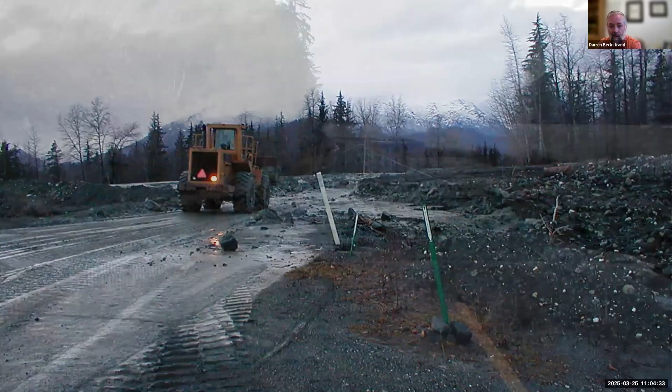So what are the geohazards affecting the transportation system? These are a lot of examples from Alaska - debris flows, erosional slopes, rockfall coming down into the highway, affecting the transportation network. These are obviously not planned occurrences - major rock slides that can close a road for a long time, or these shallow slope failures with trees, including rotational landslides and translational slides like this.

Over time, all these types of maintenance events can occur and add up to quite a bit of disturbance and blockages and lack of transportation infrastructure, especially in Alaska, where there's often not a detour. A detour might include driving 8 hours to a ferry terminal, getting on a ferry for 8 to 12 hours, and then continuing further south after driving through a mountain shared with a railroad tunnel.

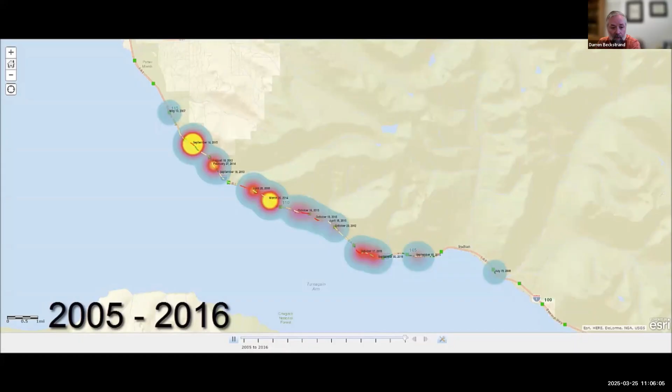The transportation networks there especially need to be reliable and resilient, with as few geotechnical hazards as possible that inhibit passage of traffic. This is an example of a hotspot map south of Anchorage on the Seward Highway, where there's been a lot of work done in the past few years with rockfall hazard reduction through a mitigation program, extending this type of maintenance tracking database to the entire state.

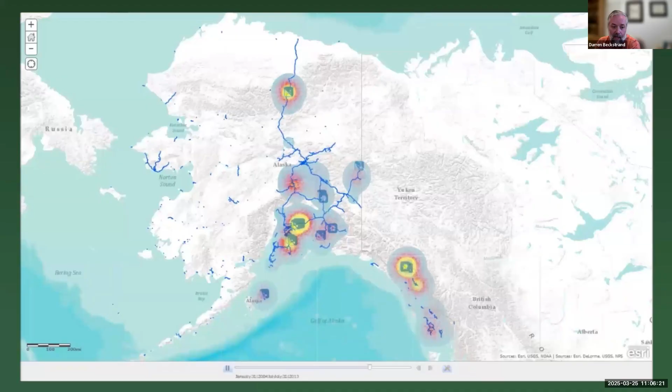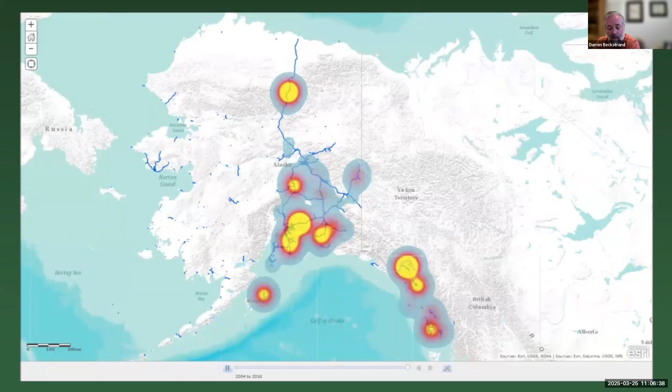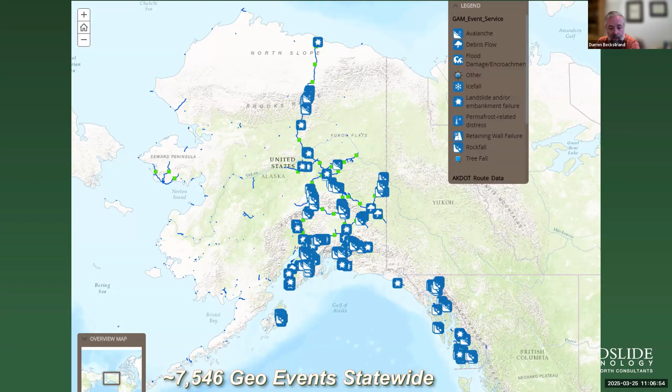You can see how you have a lot of different adverse geotechnical events over several years. As you plot these up and develop a heat map of where all these things are occurring, the concentration of where you might need to focus your energy, time, and investment can make itself evident. With this sizable problem spread throughout the state - about 7,500 adverse geotechnical events occurring statewide - it would be ideal to have a systematic system of addressing, recognizing, and evaluating these things and comparing them to one another.

That's a very good reason to manage geotechnical hazards. Typically, the normal approach - hopefully becoming less normal - is to let the ground tell you where you need to fix the slope. So the ground falls, a rock falls into your highway, you have a landslide, and you have to respond.

But there is a better way. That's also the most expensive way to typically do it. Large owners like the DOTs in the examples shown will have hundreds of vulnerabilities, producing thousands of adverse events across the entire highway network. A systematic and rational approach to help prioritize risk reduction in a cost-effective way is needed.

The transportation industry uses an approach called transportation asset management, something a lot of us know about on the periphery through the National Bridge Inventory. Notice in all those slides I had up there wasn't a single broken bridge. That's because they are more actively managed, recognized as a manageable asset. The federal government requires states to manage their bridge and pavement inventories as part of an asset management plan. The same principles can be applied to geotechnical assets to help identify, assess, and reduce those risks and reduce expenditures for a similar network outcome.

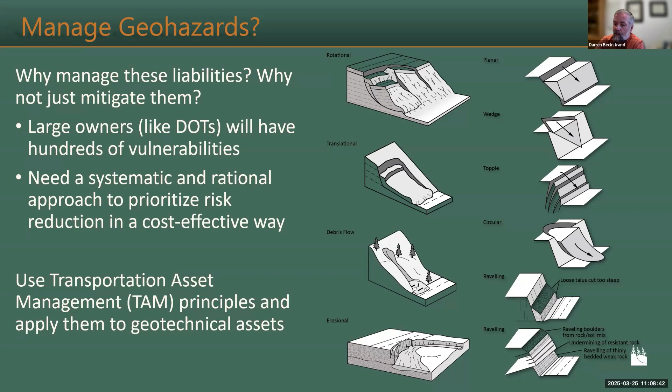So what is transportation asset management? It's a strategic and systematic process of operating, maintaining, upgrading, and expanding physical assets effectively through their life cycle. That's from the AASHTO.

Transportation asset management for bridges and pavements is required, and it's encouraged for ancillary assets, which is an improvement from the past. Ancillary assets are things like intelligent transportation systems, the signboards that tell you traffic delays, guardrails, sound walls, signage, striping. Those are all, including geotechnical assets like retaining walls, types of things encouraged to have an active, proactive management program.

But what does it actually mean when it comes to the folks in the states to manage the program? It means that no federal directive is required, so it may mean that it's likely considered optional by management. Fortunately, there are enough states starting to recognize there's a benefit to it, so that's changing a little bit.

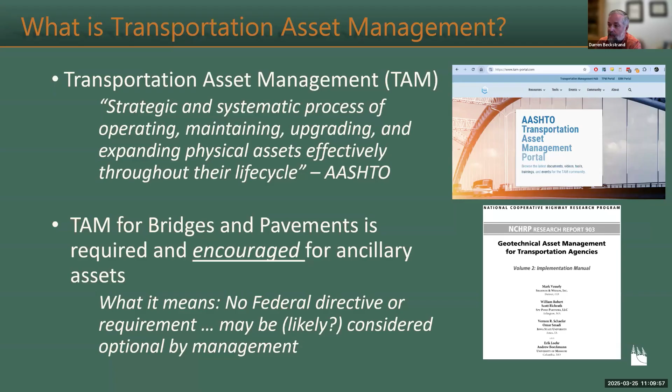The application of TAM business models to geotechnical assets is kind of a difficult thing to explain, so I've tried to do it here in an explanatory paragraph. Imagine you are a geotechnical professional working for a DOT, and you want to be able to say: my department has 5,000 geotechnical assets. That, again, gives you the inventory to know what you own.

And of those 5,000 geotechnical assets, 75% meet performance criteria. So you set expectations, and then measure the performance of your assets against those expectations. Pavement does that quite often—they'll have dashboards up saying 90% of our interstate pavements are in good condition. That's something we can also do for geotechnical assets.

We're also able to estimate deterioration. If we do nothing in 10 years, instead of 75%, it'll drop down to 65% meeting those performance criteria. And that uncontrolled deterioration will have a cost that we can estimate—resulting in $10 million of direct costs and indirect costs of $30 million.

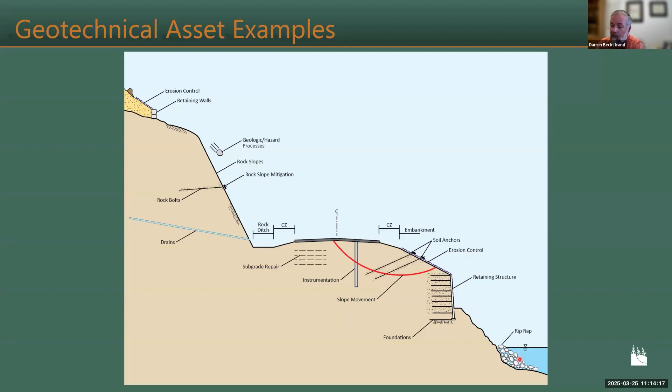Since then, additional states have been focusing and expanding their asset management system. Some states that don't have a lot of rock slopes, which is most states of course - the West Coast or Western U.S. had a lot of rock slopes, so they were some of the first, and then in the Northeast they had some of the first programs that evaluated that stuff. But some of the Midwest and Southern states have been focusing on their geotechnical assets, such as retaining walls, and expanding and addressing those things since 2010, especially more in the past 5 or 6 years or so. It's starting to gain some steam, and states are doing it.

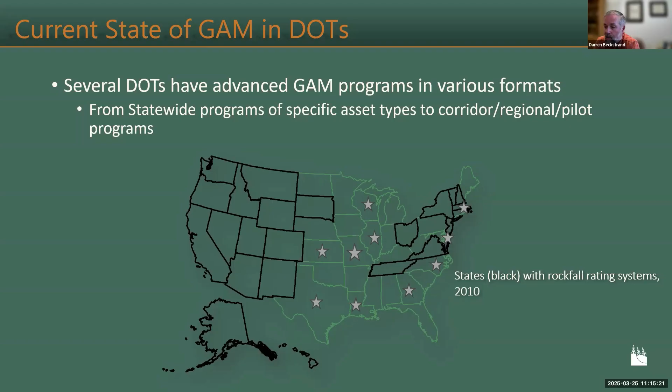So a few key components, highlighting again that explanatory text from the previous slides - key components of a mature GAM program. I call out mature with some intent. A state DOT doesn't have to go in both feet first into the pool; they can dip their toes in and start with an inventory. There's no required way to accomplish these things, and there's no wrong way to get started. But what is critical is that you understand that a lot of these things are great to have if you own thousands of miles of highways.

So key components of that mature GAM program: it provides an inventory. A lot of owners don't know what they have, don't know what's out there, don't know where walls are. And just because you don't know doesn't mean you don't have any liability and that there's no cost involved, because those deteriorating assets will make themselves known usually at the most inconvenient time.

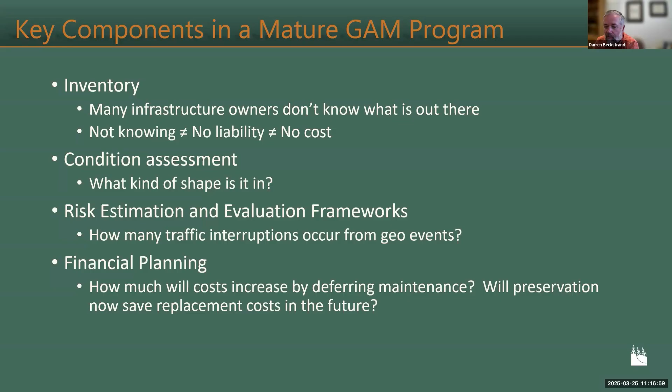It also provides a condition assessment - what kind of shape is it in? Is it in a good condition that is expected to preserve performance for a long time, or is it in poor condition that needs major repairs? Then there's risk estimation and evaluation - how many traffic interruptions may occur from these geo-events, from these unknown assets that we might have out there? And then financial planning - how much budget should we set aside for these things over time?

And we also gave them preliminary assessments of A, B, or C, if that's possible, to help focus where the more field time would be required.

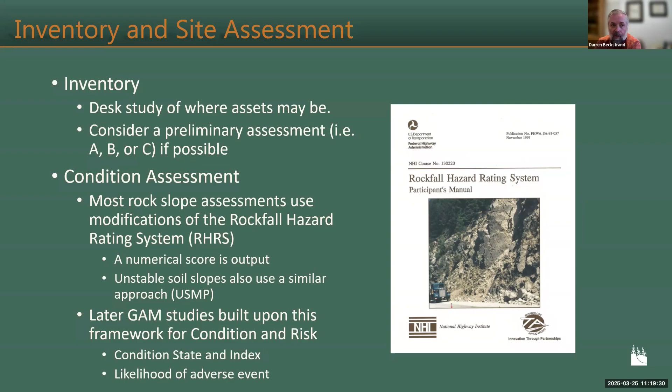Site inventory and site assessments are typically the best place to start. As I said, the site ratings, you collect a lot of different information. I'm going to go through the Unstable Slope Management Program, kind of touch on some highlights from the USMP form for the federal land management agencies.

That program is contained largely on a two-sided piece of paper, and you start with the location information - highway mile points, left or right, lat long of where it begins and ends, some geometric data of the site, and it has geologic data and judgments incorporated into the ratings.

Some performance data, rockfall history, how often maintenance has to act on there, and consequences of the failure - how much traffic relies on that road.

If you don't have good traffic numbers, does that road go to a very important boat dock for the Bureau of Land Management? And if that road was closed, then the local economy starts to die down. Those types of judgments and assessments can be built in there.

If you're in the national parks, is there national, environmental, or cultural impacts if this unstable slope continues to fail uncontrolled? Those evaluation forms are set up specifically for special purposes, for national parks in this case, or for those specific cultural and environmental impacts.

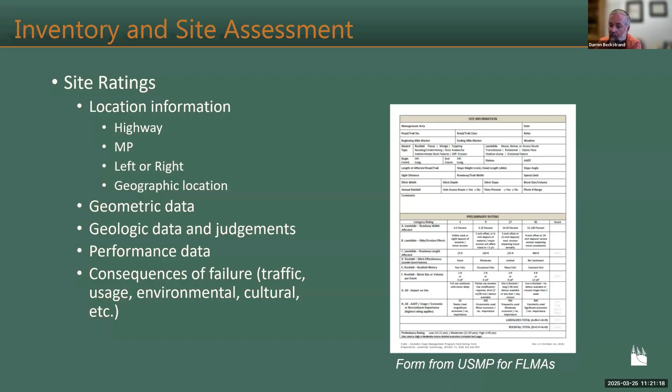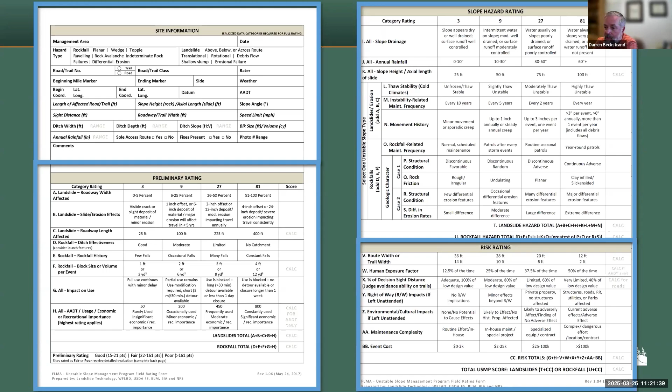Zooming in a little bit on the two-page form, you have site information, a preliminary rating category, slope hazard ratings, and a risk rating. So you have over 24 different things to evaluate on each one of the unstable slope sites that you might have throughout your state. I'm just going to touch on a few things on this as I go through the presentation.

The site information portion of it, this is the top quarter of page 1. You have things like what management area and what date the slope was evaluated, hazard type - rockfall, landslide - the road number, and other site measurements like sight distance, length of the roadway affected, slope height, speed limit, block size, and some comments.

It's always good to have some comments in there to kind of give a quick synopsis of what the evaluator wants to most effectively communicate about the site. This is a lot of information, but a lot of it can be pre-populated through that desk study.

The intent for all this, believe it or not, we try to spend only about 15 to 25, 30 minutes at a complex site, going through and evaluating the entire site and then moving on to the next one. So all this information does facilitate a pretty quick assessment of the sites.

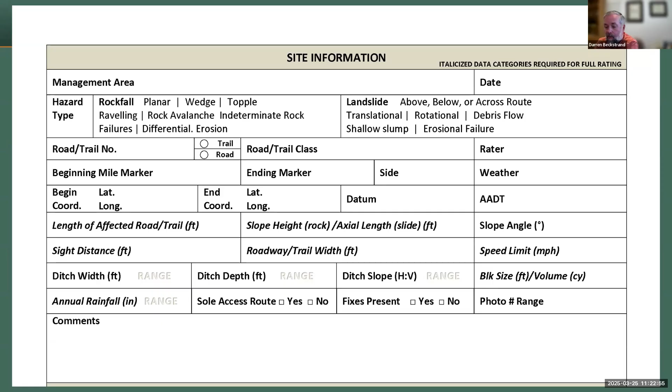Some example information being gleaned - you have the road and trail number. Trail number is something the National Park Service specifically wanted in this one. They wanted to be able to evaluate the importance of high traffic or even low traffic trails and how they're exposed to geologic hazards. That's pretty unique in the USMP system.

But corridors, highway numbers, route name, classification - if you're not familiar with it, we're all familiar with the interstate system, but most DOTs have primary arterials and secondary routes and whatnot, and those are often important to gather and understand, so you can help gauge the importance of that route and the performance of the roadways next to it.

You can also evaluate if it's a sole access route. So especially in some of these western states, they'll have a highway number that just goes to a dead end. And if that slope fails and no one's able to get in or out, that's a different importance than something with an easy detour.

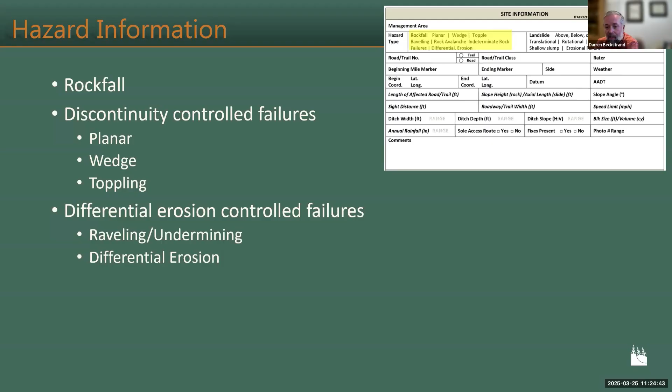Hazard information that might be going on there - rockfall, discontinuity controlled failures. So things like planar, wedge, or topple failures are more of the hard rock type of failures. And then also differential erosion failures. In the southeast, more sandstone, limestone interbeds, where you have the more weatherable prone materials weathering out and destabilizing the sandstone above.

Topple failures - I'm standing in an opening tension crack high above a rock slope in Montana, where in this case we wanted to make sure that it was still moving before the state decided to monitor or do anything with it. And yes, it was moving, and the tape extensometers and crack meters did demonstrate that.

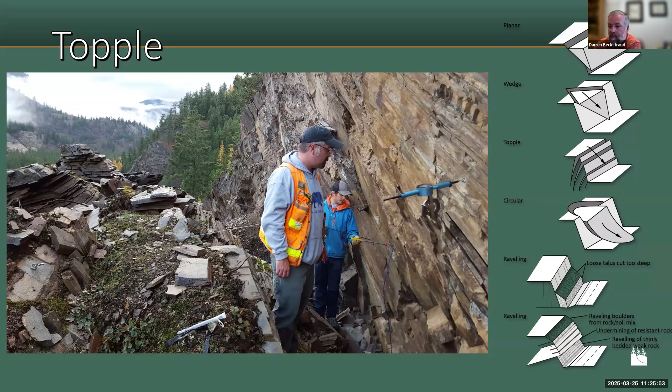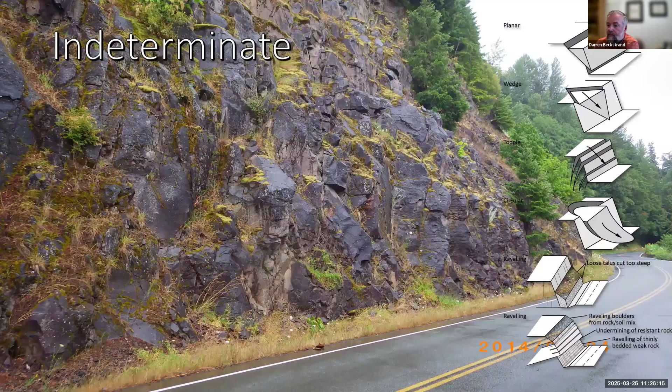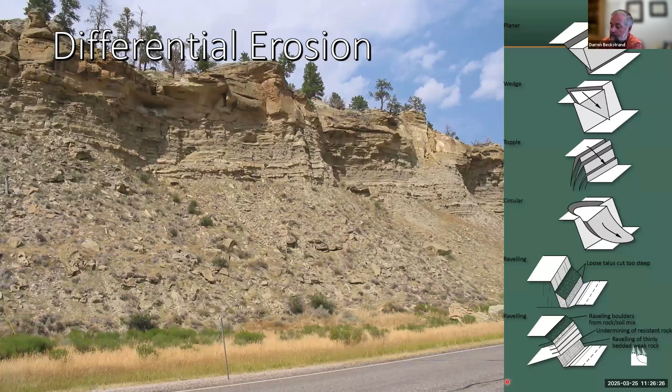Oftentimes you'll have a slope where the structural condition is not as clear. This is more normal: a bunch of intersecting discontinuous joints combining to have 1 to 3 foot blocks fail out. Differential erosion failures of siltstone sandstone beds, in this case in Montana, where large blocks might fail out over time. A recent picture from Tennessee of differential erosion slopes being evaluated for Tennessee DOT.

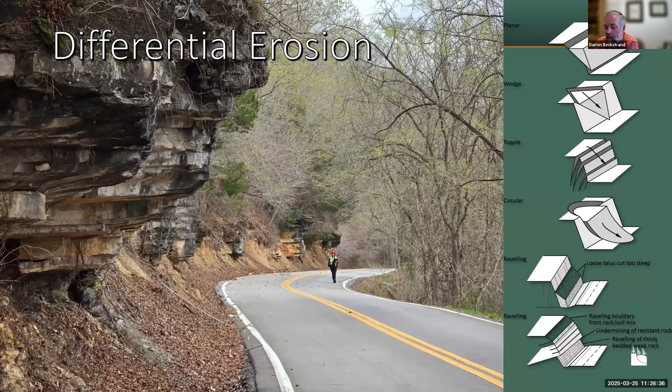Landslides are something in the USMP that was evaluated. Where is the slide located relative to the road? We have some of that basic information. Is it above the road, below the road, or worst case, it's both, going through the road, taking the road down for a ride.

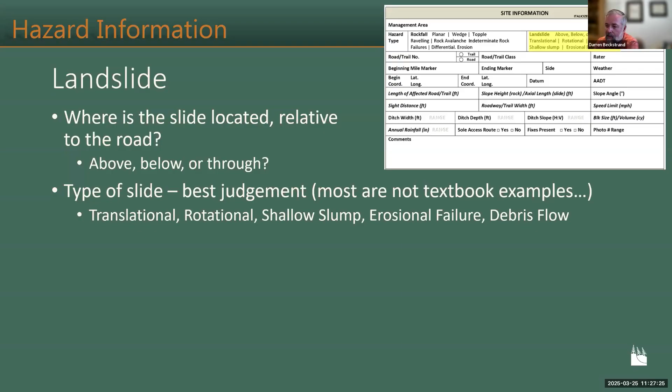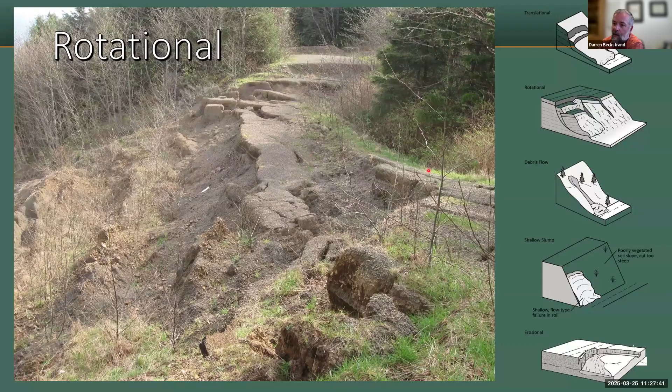Type of slide, best judgment is what's warranted here. Almost every slide is not a textbook example of a nice rotational or translational failure. But here's some photos showing characteristics of rotational failure, where the material rotates backwards into the headscarp, sliding down and rotating slightly near the headscarp of the slide.

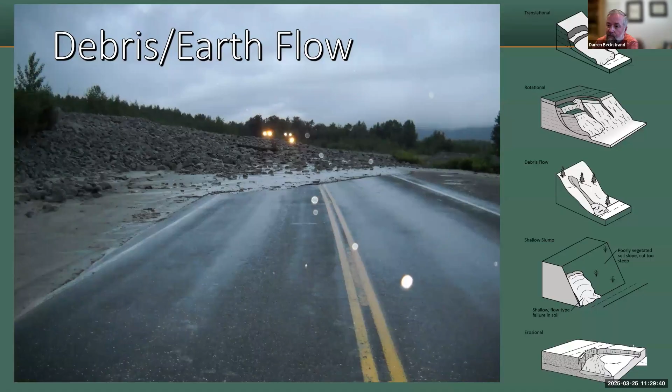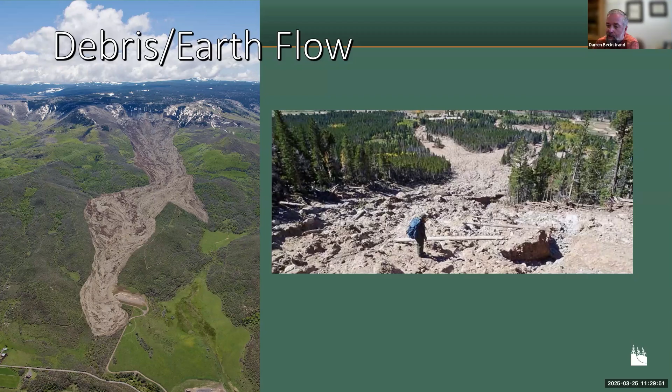Earth and debris flows in the USMP system are categorized as landslides. One from Colorado - I know several folks here from Colorado - this is the Salt Creek slide, I think I got the name right. Then the headscarp from another debris flow on the right.

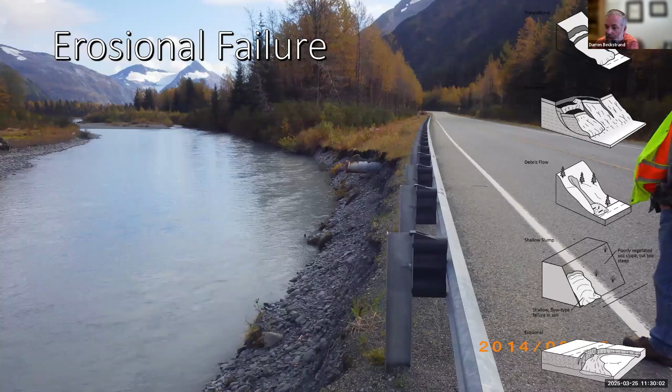Erosional failures can be classified also as landslides. Getting these in the inventory and condition assessment so you can prevent them, rather than just allow them to eat away the road, is important. Same thing with easily erodible material slowly eroding out on oversteepened slopes that your highway is sitting on.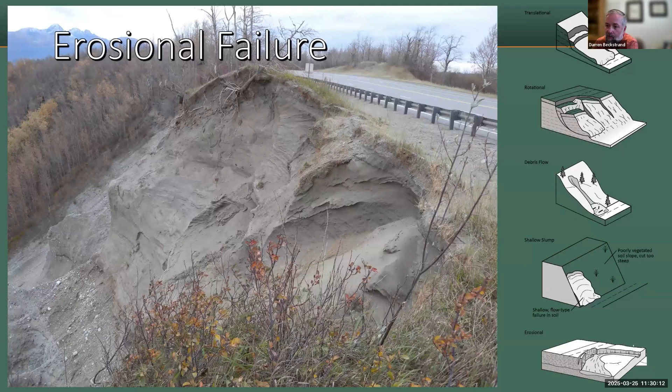Often here in the Pacific Northwest, these slump failures are the most common landslides we see, where the overburdened soil on the side of the road just slumps out during heavy rain.

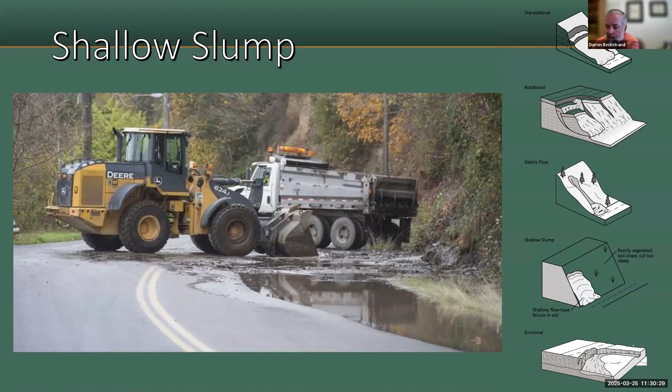Other rating data collected in these types of programs are numerical data rather than judgments on the nature of the slides or rock slopes. We look at slope height measured as the vertical rock slope, and we estimate the axial length down the slide.

If possible, you can do some reconnaissance to find the slide toe, but oftentimes it's masked by embankment riprap or fill. You don't always have that clean toe coming out. So you have to use your professional geologic judgment to help define those, and your equipment is typically handheld: a laser rangefinder is wonderful, along with a clinometer and tape, doing some trigonometry, or better yet having your Excel sheet do the trigonometry while you're out there.

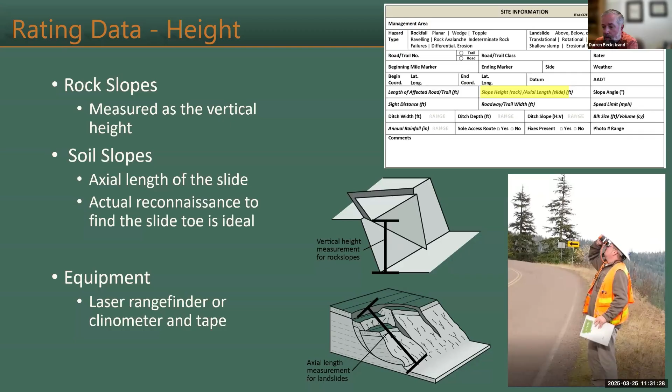Another type of measurement data that is collected is sight distance. That's something that as a traveler, you typically understand — if there's a sudden surprise in the road, you want to understand that that's a risk to you. As I'm sure we've all done, coming around the corner, you see something, a deer or whatever.

You have to quickly stop or slow down to avoid the hazard. So this is an estimate for, say, a rock being in the road. The evaluators are typically on site doing our best to safely measure sight distance during live traffic. We're often not idealized like in this photo walking down the travel lanes — we're often on the shoulder, or we'll use our rangefinder to estimate that sight distance. So again, 15, 20 minutes on site, you're doing things pretty quick. We use a roller tape or a laser rangefinder to do that.

A couple examples of sight distance. If a rock came rolling off the hill here, you're going to see it while flying down the road at 55 — or in Montana, probably 70 miles an hour — but you're going to see it, you're going to be able to avoid it. But right around the corner, if you're coming this direction and this rock's in the road, even though it has a 35-mile-an-hour speed limit on the corner, you still don't have a lot of sight distance. The sight distance can be blocked by the guardrail, vegetation in the ditch, or other material in the ditch that is hindering sight distance. So that's an important risk aspect that we measure while we're out there on site.

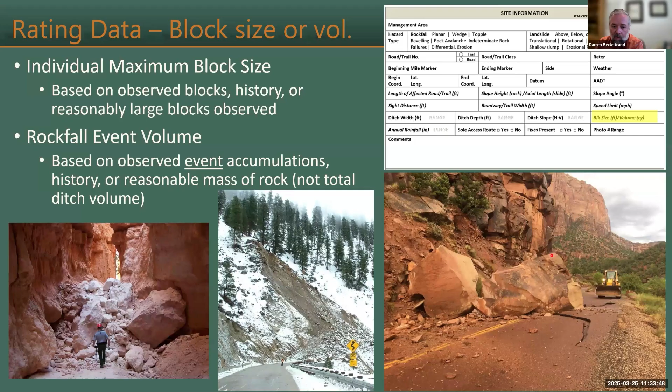Other data that is recorded is block size. You would expect big blocks like this, large volumes, on the highways or trails — that's going to rate very highly, right? Instead, if this rockfall was just this rock down here, you would say well, that's not great if it's flying down the hill and goes through a windshield, but the risk is greater for these larger blocks coming down. So a lot of it's intuitive with how these are rated.

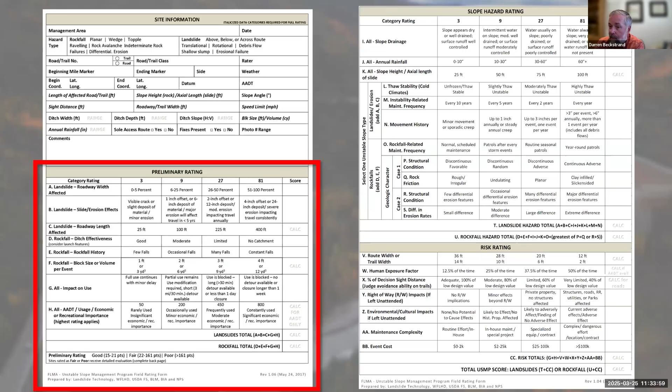Jumping down to the preliminary rating from the site information tab, there are several different categories on here. Several different categories for landslides, for rockfall, and how it's scored.

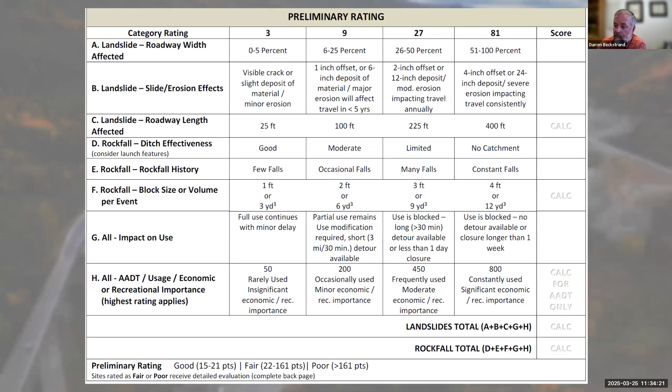Slope types are hazard criteria for landslides — they focus on impacts to the road and trail. Hazard criteria for rockfall focuses on size and frequency of the rockfall and the ability to keep debris off the road or trail. Risk is something that you can compare on both slope types in the USMP system. What are the consequences of failure? How important is the road or trail? You can base it on traffic loads coming across the top here, or if you don't have traffic counts, some guidance for opinion. Note that this all has A, B, C, or D type markers or designators on it, so you can help add up and define which categories add up to what.

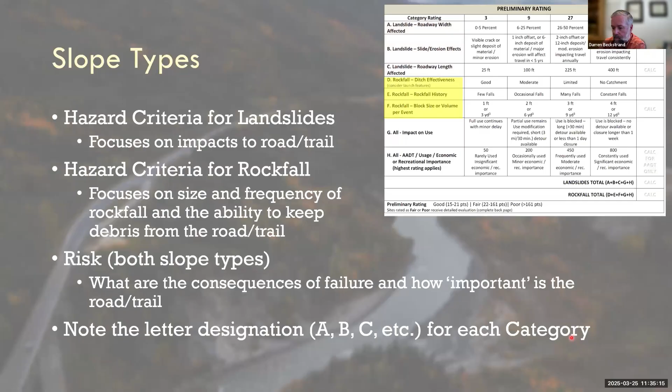So all these ratings are exponential — notice across the top, 3, 9, 27, or 81. That's to help bring the high hazard slopes to the top, regardless of what brings them to the top. A minimum of 1, and it does max out at 100. Each individual category score here is based on this 3-to-the-power-of-X.

Some categories are based on judgment and approximations, and others are based on calculations from the site information portion of the form. For example, this is a score that evaluates the economic importance — ADT divided by 50, the square root of that, gives you the X over here.

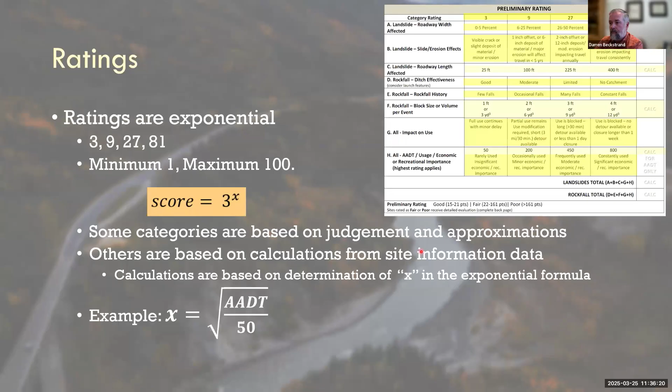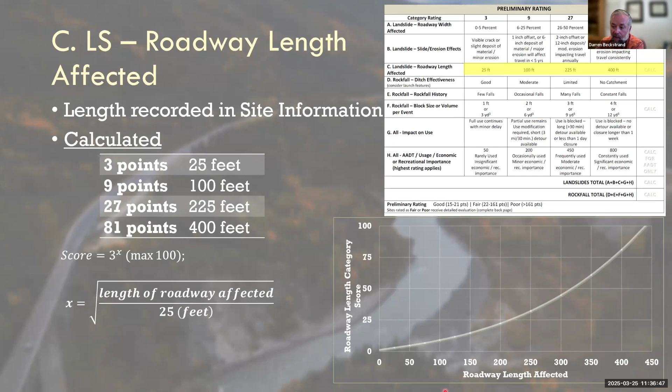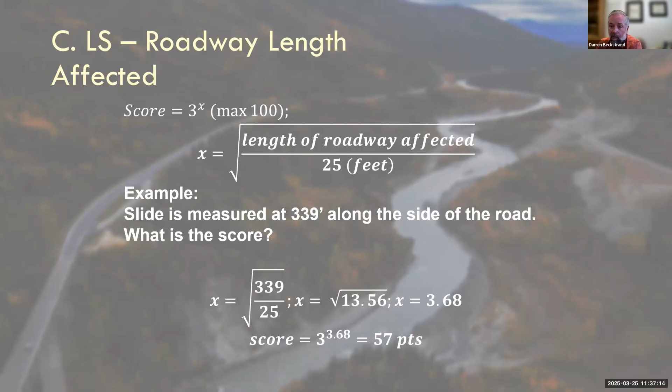Going through a quick example: if a slide is measured at 339 feet along the side of the road, what's the score? 339 divided by 25 gives you the 3.68 exponent, and a resultant score of 57 points. This is why it's good to have a calculator, a database, or a data entry platform to help you with these calculations rather than pulling it off a chart on site or doing the math on site — you're trying to rapidly go through it.

Those are ones based on site measurements. Others are based on the opinion or judgment of the experienced geoprofessional on site to evaluate it. To highlight that approach, the ditch effectiveness is based on history, judgment, and site observations.

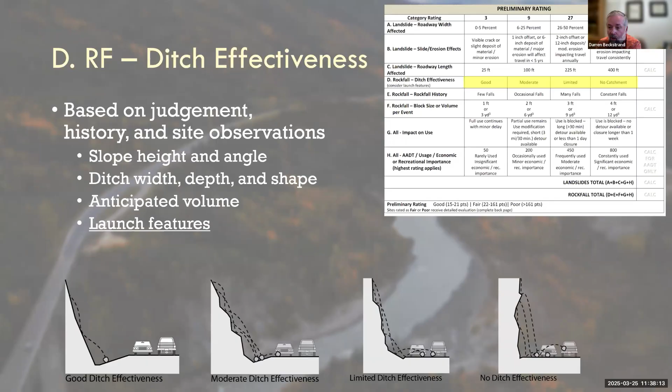Slope height and angle, ditch width, depth, and shape, the anticipated volume of debris that ditch would have to collect, and especially launch features. That takes a little bit more of a trained eye to help understand what the launch features are, if you can imagine a rock falling down the slope.

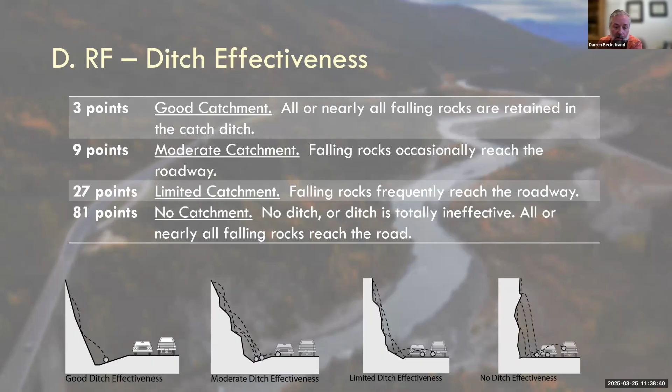So some photo examples after this slide, with some text and explanation that goes with it. So 3 points is the low score, good catchment: all or nearly all falling rocks are retained in the ditch. All the way to 81 points is no catchment: no ditch, or the ditch is totally ineffective, and all or nearly all falling rocks reach the road. So if you have a highway, you'd want a ditch to look like this, nicely regraded.

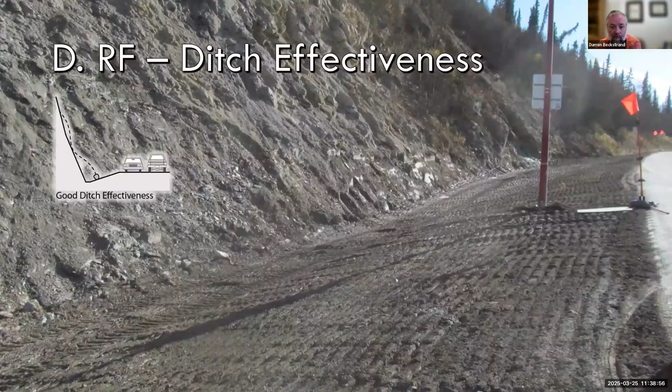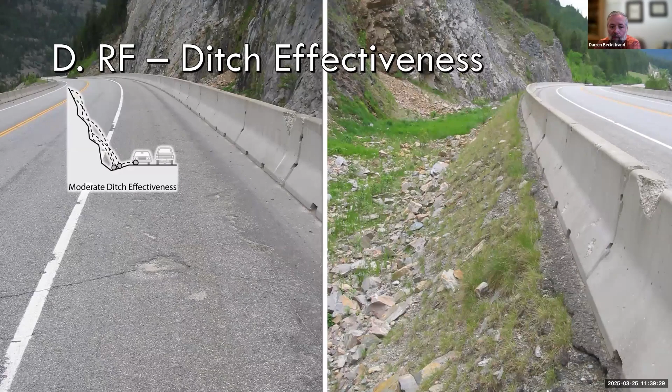Other clues: this ditch is pretty big, what used to be called a Ritchie ditch. You can see some damage shown here, some rocks coming down and even damaging the concrete barrier and impacting the roadway. So those are signs and clues an evaluator uses to say, hey, this ditch is big, it catches most of the stuff, but the rocks coming off that slope, it's too tall.

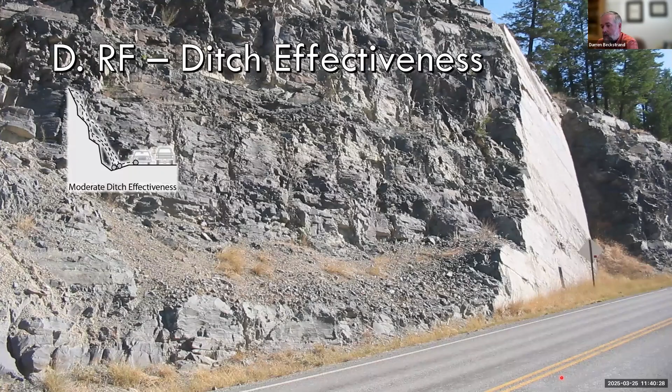And they will still fly out and break apart, only having a moderate ditch effectiveness. Again, this one has a bit of a launch feature coming off here and a relatively small ditch. Comparing this portion of the ditch to this portion, you usually want to take the more conservative approach and take the reasonably worst case scenario from a slope, not just look for the best parts of it. You're not trying to give brownie points to these slopes, you're trying to accurately assess the risk.

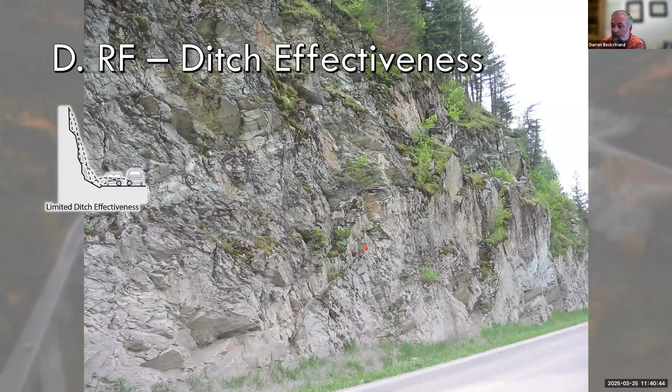This one is a pretty narrow and pretty tall, irregular ditch, so it has pretty limited ditch effectiveness. You can probably imagine most rocks coming down will be able to escape that ditch with relative ease. And this one is also limited.

You're on a turn, which doesn't matter for ditch effectiveness, that's a different risk category to be scored. But the big one here is this launch feature. As the rocks come down that slope, all of them are going to hit this bench, and it's inclined such that they all get redirected right out onto the road. So this one would really get docked in the score category for how that slope is redirecting rocks onto the road.

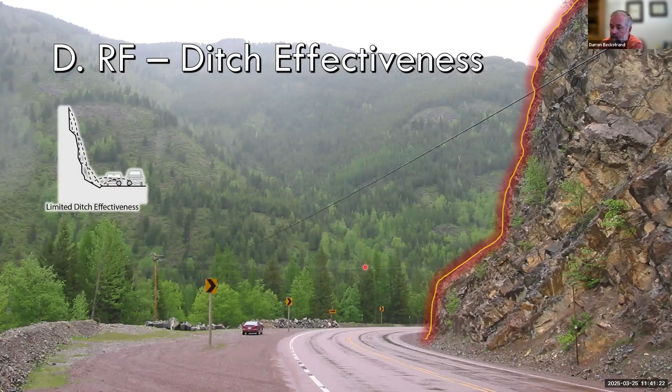This ditch, it's not uncommon, especially in mountainous areas or highways, two-lane highways connected or constructed in the 50s, that the ditch might only be a couple feet wide. This is a forest road ditch, and this one is from a picture from earlier. So this is limited ditch effectiveness.

And no ditch effectiveness, sometimes the contractors back in the day said, well, the road can fit, so I'll just put it there, and the owner said, okay, save me some money. But this one doesn't have any ditch effectiveness. Rock comes off here, it's going to drop right in the road. And on Going to the Sun Road in Glacier National Park, there's also no ditch in that entire road. So if you've ever been there, it's a great place to visit. It's a great place to spend as little time as possible underneath the rock slopes also.

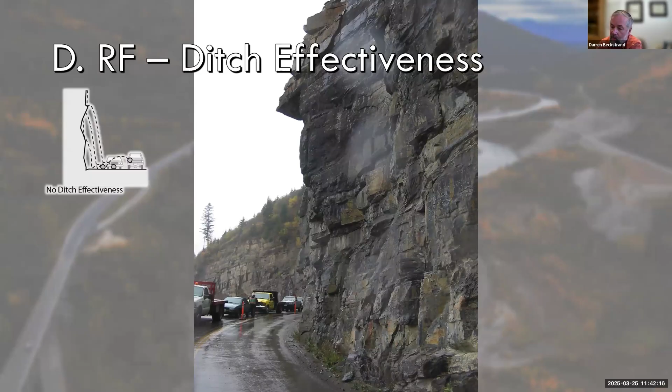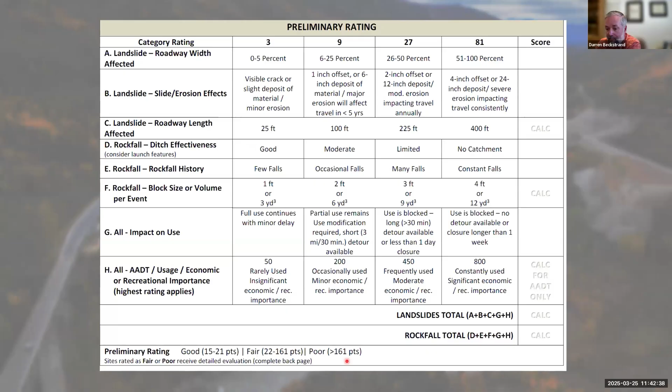So at the end of this, we have the preliminary rating. Add up all these things, evaluate them, and you get a preliminary rating. And if you have a fair or poor based on the sum range, you flip the sheet over and continue doing a more detailed evaluation of the site.

So turning that form over, we have the slope hazard rating, with several categories: slope drainage, annual rainfall, slope height or axial length that we talked about before. Landslides have categories such as thaw stability, maintenance frequency, and movement history, while rock slopes have rockfall related maintenance history. Then also the geologic character - this is where the ability for a geoprofessional, a geologist, or a qualified geological engineer to come through and evaluate these more qualitative aspects of the slope is important.

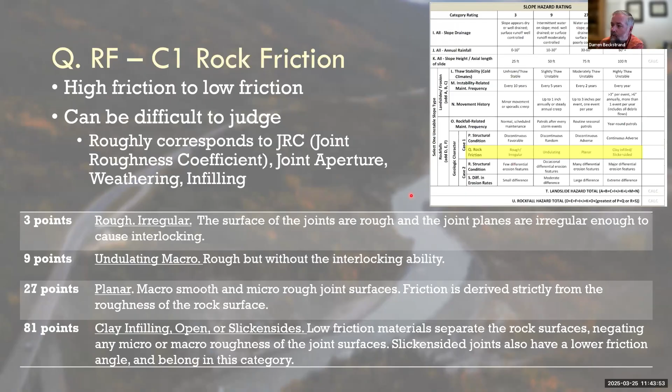And again, those are evaluated on a 3-to-the-power-of-X type scoring system: 3, 9, 27, or 81. From rough and irregular, to undulating and planar, to clay infilling, open or slickensided. You can imagine the reduced friction that joint surface would offer to resist sliding and failure. It can roughly correspond to the joint roughness coefficient, if you're familiar with that - an approximate measure that helps evaluators guide their opinion, and it's been in the literature for several decades.

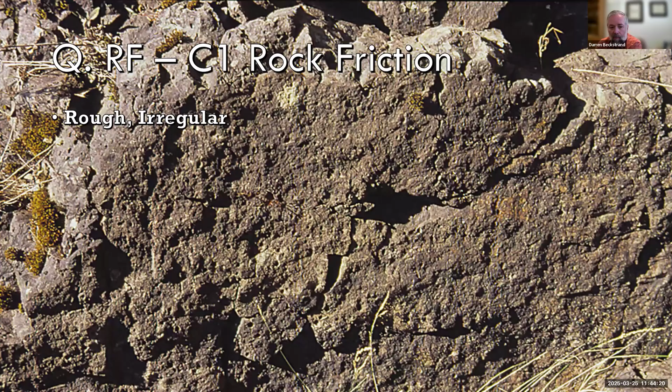Some photos of example photos of the rock friction score. So this is rough irregular. I think we can all agree that makes sense. Undulating is especially common in basalt columns and stress relief joints.

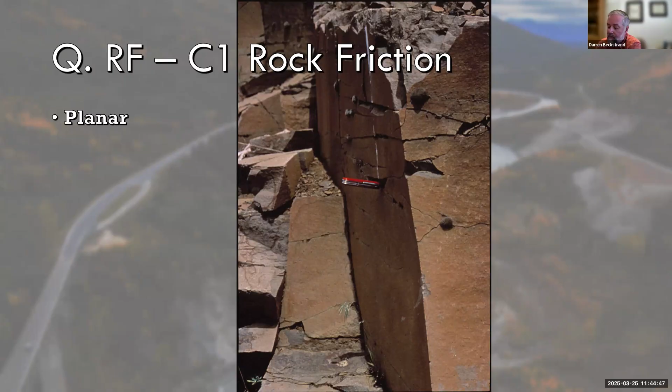Planar failures. This photo is also from basalt, so the orientation matters, how that friction is going to interact with the orientation of them, which are judged separately as continuous adverse or discontinuous favorable. That's how you evaluate these.

Some more examples from Alaska for these planar joint frictions. This is on the road to Valdez, and I was in awe when I drove through here in 2010 or so, of how massive the structure was in this area. But this is a good example of continuous planar adversely oriented joints.

And also forming those ones in a toppling failure mechanism. And clay filled, slickensided, that's a good sign that any sliding on there will be facilitated by the weak clay material and the pore pressures also.

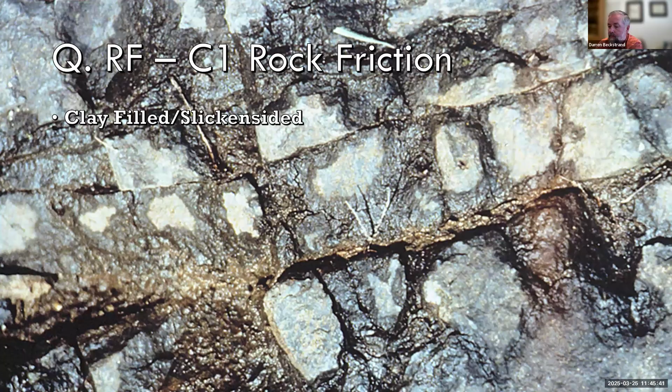Breaking it down into the risk rating. So those examples were shown over here through that rock friction score. Again, we add up for landslides certain categories from the front of the sheet and from the back of the sheet for either landslides or rockfall, and then we jump onto the risk rating form. So we have a quantitative number for the hazard scores, and then you can jump into the risk categories.

I'm just going to highlight one on here: the percent decision sight distance. That's an estimate of how quickly you are able to respond to that. I used those two photos as an example earlier on.

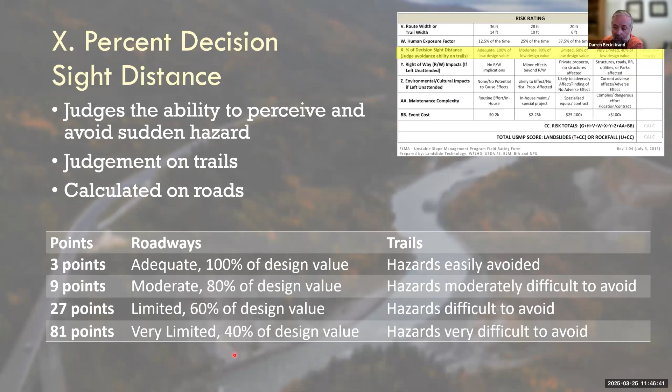Again, it's 3, 9, 27 points of how the measured sight distance compares to the AASHTO recommended design value for that site. So this site, as an example, has a 175-foot long sight distance measured around this tight corner. The recommended sight distance for that speed limit, 35 miles an hour, is 525 feet.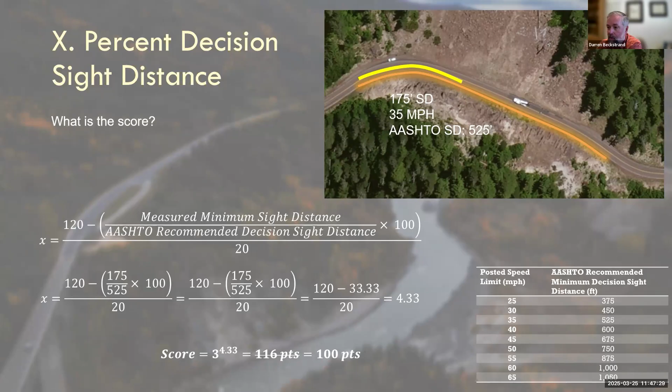Do this complex equation. So, of course, every good presentation has complex equations, so here's mine. All these numbers plug into an exponent of 4.33. That scores up over 100 points, so it caps out at 100. So instead of 116, it gets capped to 100 points. Those are the sight distance scores on the risk rating score.

Total scores are then added up, and you can use all these numbers - there's the same number of categories in the USMP for landslides and rockfall. You can then say, hey, this 600 score landslide is not as bad as the 700 scored rockfall, so I'm going to maybe address the rockfall site first. So that helps provide a little bit of decision support to managing all these inventory of assets that you'd have.

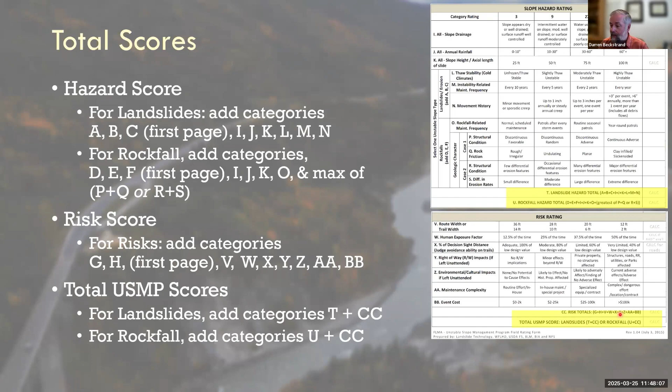So that kind of concludes the quick explanation of how those are rated. I'll try and wrap it up here in the next 5 minutes.

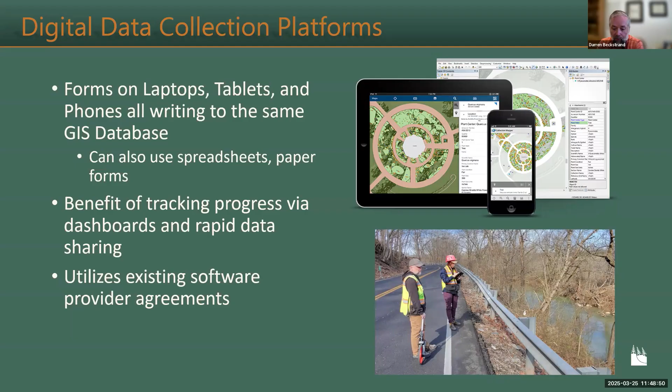That's a lot of data to collect, so a digital data collection platform is key. We've been using Esri products, ArcGIS, Field Maps, and Survey123 in our recent work. You write all that information onto a shared geodatabase, regardless of the phone or rater going out there. You can have multiple raters go at it all the time without having to combine databases later on.

We use, when possible, the client's Esri platform permissions, so they own the data all the time. That's important for a lot of clients - they don't want to have to worry that if we screw up and get fired, they still own the data we collected for them. They don't have to have any ongoing service agreements for it, so it's always owner controlled. IT security is something that's gaining in importance over the past few years.

Slope condition for rock slopes - we use these in a variety of different ways. Communication is one of the main ones. You want to be able to explain to your manager how many of the rock slopes are in poor condition, without getting into the weeds and nuance of 25 is not as bad as 20 and so forth. So you want to say 5% of our slopes are in poor condition. Okay, understood.

As you get into more of the nuance in the condition range, that's where more geotech or technical folks can use that.

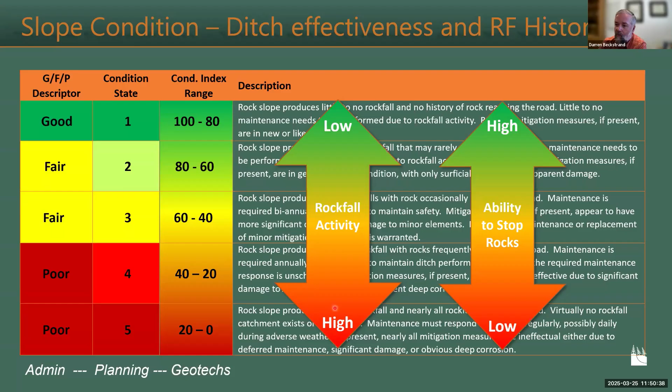For rock slopes, ditch effectiveness and the history of the site define the rock slope condition. In essence, low rockfall activity and high ability to stop the rocks is a good performing slope. Likewise, high activity and a low ability to stop the rocks means a lot of those rocks are getting on the road, and that's not a good thing. A mix of them will fall in the middle, the fair categories.

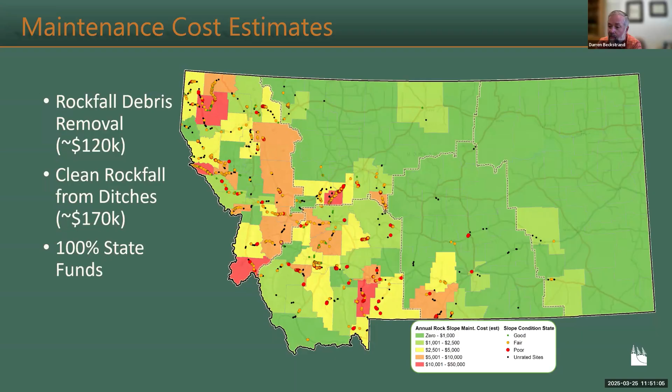Slope deterioration, I mentioned those earlier on. It has the interesting title of where this was first described from the Rand Corporation, I think in the 60s, of analyzing the future. So very futuristic type of terminology goes with it. What happens is we're asked questions. This is how bridge inventory condition or databases got started, how pavement inventory databases got started before they collected data for 20 years to really analyze deterioration.

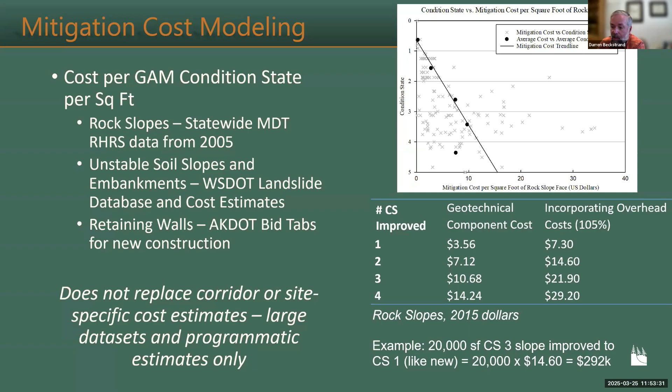We also looked at risk monetization using AASHTO principles of detour and traffic loads, and the probability of an adverse event based on maintenance history, using various degrees of accuracy and precision in the data or in the reporting from maintenance personnel - all the way from it happened on this day, the closure duration was 39 hours and it slowed down for 3 days, versus it was around February or spring of 2013 and it took months for us to recover. So we had to be comfortable with some uncertainty and some generalization through those types of anecdotal reports.

Looking at those risk results, we were able to develop a probability of event likelihood per square feet of rock face in each slope condition. What that's based on is condition and size. As you would expect, a very large slope in better condition does pose a risk, but a smaller slope in poor condition may pose more risk, even though it's much smaller.

In this example, one slope might be 1,000 feet long by 150 feet tall, but it's in fairly good condition - you have a 0.5% annual probability of an adverse event occurring. But one that's a fifth of the length and a third of the height, but in poorer condition, has double the likelihood of an adverse event, even though it's 13 times smaller in size.

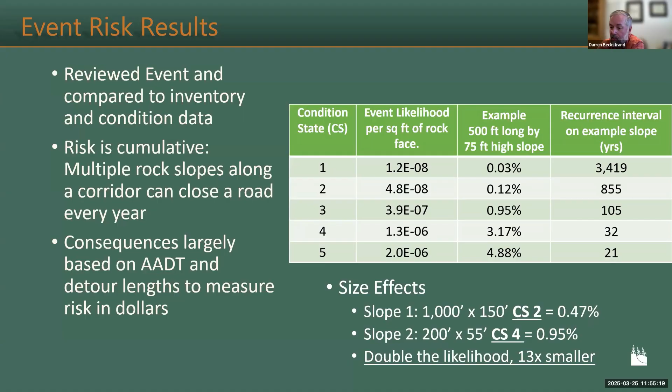One other thing we've incorporated is some risk tolerance based on the type of network system you're on. Your interstate, you're less tolerant of risk, but on those minor collectors, you may be more tolerant of risk. Those are something we propose for the Montana system.

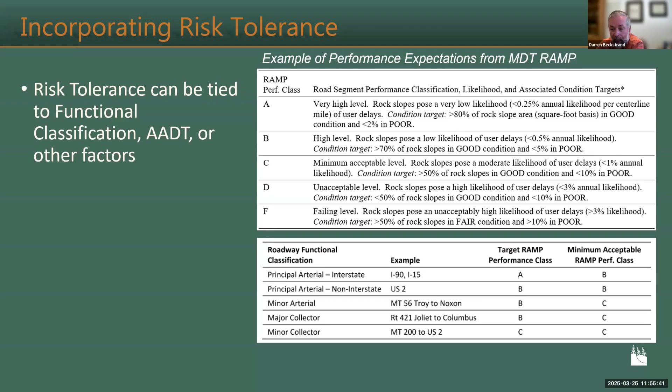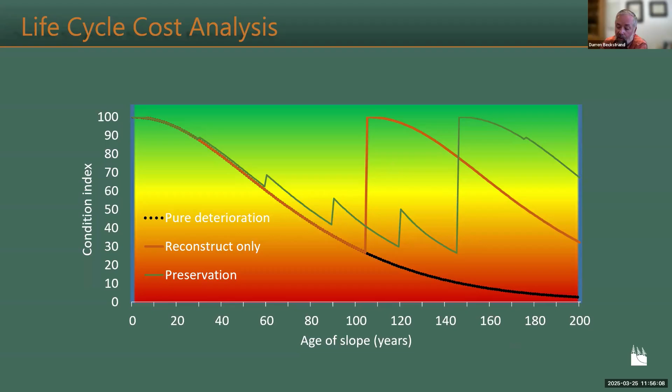A life cycle cost analysis is something you can do from here also, of preservation activities, rather than allowing everything to deteriorate uncontrolled and spending a big dollar amount to reconstruct the site. You can push that back for decades if you are maintaining and preserving site performance versus reconstructing it when you have to.

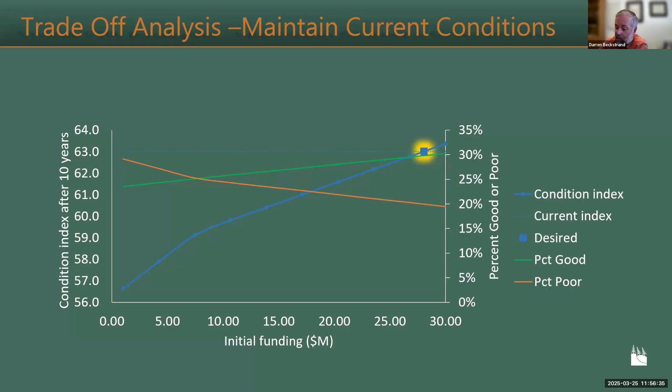That's where you see a lot of the cost benefit of preservation activities. It also helps you set those annual budgets for funding, and where the condition index will be over 10 years for various investment levels. So if you're aiming to preserve network condition, and the network condition's 63, you need to invest about $28 million annually to preserve that rather than allow it to deteriorate uncontrolled.

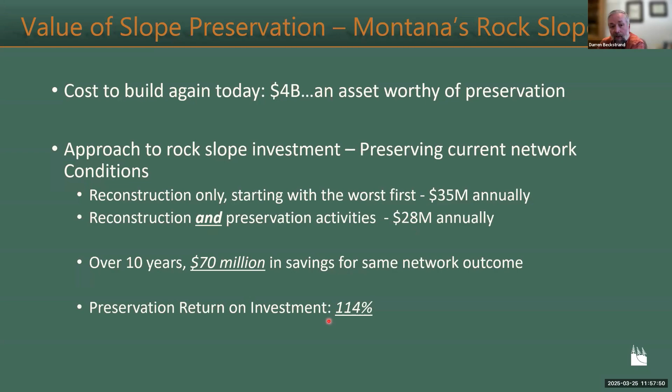They want to see value in why they're throwing money at rock slopes and landslides rather than just reacting to them. Key takeaway: the performance of geological and geotechnical features are critical to infrastructure functionality, but are often discounted or not recognized by other folks in the transportation realm or other large infrastructure owners. System-wide vulnerabilities of geohazards, even geonuisances like those small shallow sloughs, often fly under the radar because they're not counted, they're not known. If they don't know, they're not considered. Treating these geo vulnerabilities the same way as other engineered assets, such as bridges and pavements, despite their unpredictable nature, will help reduce risk and save dollars.

For us geo professionals, a couple main things to remember: be comfortable with generalities and uncertainties. Geologists often deal with uncertainties on a day-to-day basis, so we have to use that to manage expectations from folks who may not know about the uncertainties as well as we do. These tools are not a 'where's the next rock going to fall from' tool - it's not going to say this site is where the road will be closed next. Also, advocate for information to drive decision making in where to spend millions of dollars on rockfall concerns.

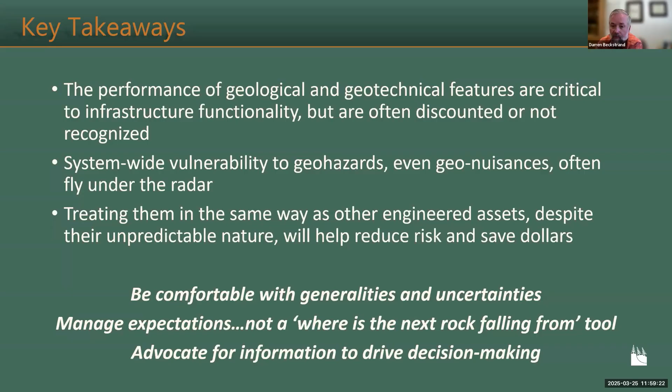So that is my presentation. I thank everyone for their time, and boy, I apologize, but there's 1 minute left in the hour.